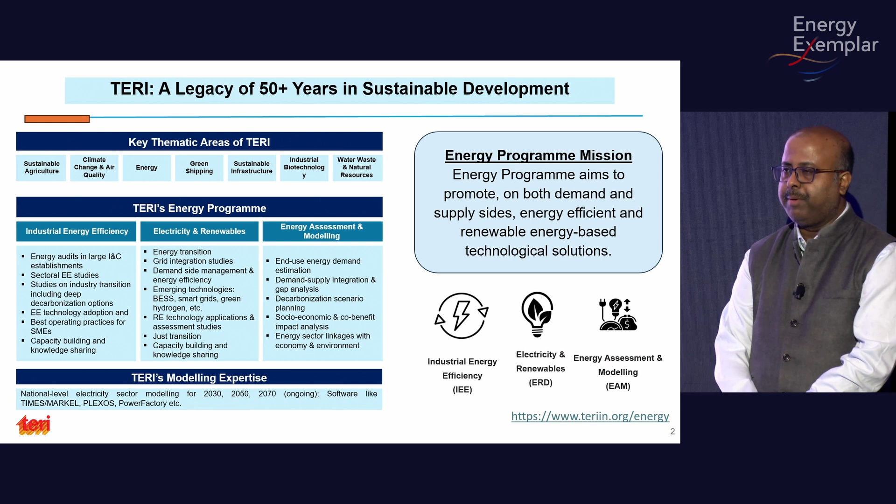So basically, to give you a sense of the work that we do, it's cross-sectoral, in India as well as in different countries in the APEC region and some European regions. We have the legacy of what we earlier called the Tata Energy Research Institute. It was funded by the Tatas. And then in 2000, we became independent as the Energy and Resources Institute. These are the larger footprints of the different types of work that we do, including the energy sector

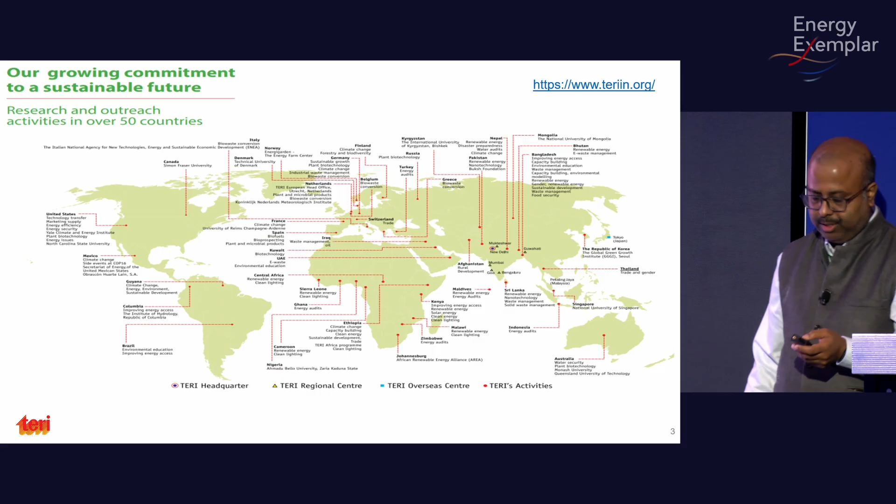and the electricity sector per se. I also represent one of the initiatives that TERI has undertaken with support from the Government of India, Ministry of Power. We set up an Institute of Energy Transitions. Under that ambit, we are doing a lot of modeling work for the country, which also includes today's presentation about 2070 decarbonization of the electricity sector.

Just to give you a little background on the Indian power sector, as I said, we have one of the largest power systems, and all the regional grids are now interconnected. To share some numbers, at present we have more than 520 gigawatts of installed capacity. One of our recent achievements is that we crossed more than 52% non-fossil fuel capacity. Our target was 2030, but last year, in December 2025, we achieved our target of more than 50% non-fossil fuel capacity.

Having said that, solar is dominating. We crossed around 140 gigawatts of solar capacity in the country. And by 2030, we are going to achieve the 500 gigawatt renewable target. Along the way, we also achieved a lot of private sector participation. You are already seeing the tariffs being discovered through reverse bidding or auctions. The competitiveness we have achieved, particularly in the RE space, in solar to be precise, is one of the landmarks in this sector.

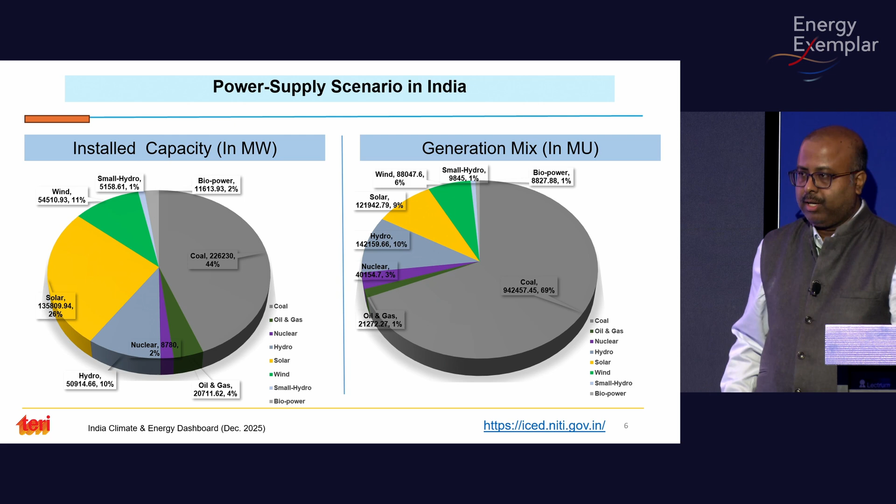A lot of capacity addition has been done, particularly after 2014 when the new government came in. With solar capacity, if you see clearly, almost a 47x capacity addition has been done. With wind, there is a larger room to increase wind power capacity in the country. And subsequently, storage, short term, medium term, and longer term, is also developing now.

On the other hand, at present close to 30% of the generation mix comes from non-fossil fuel, which includes wind, solar, and hydro. To give you some numbers, last year in June, July, and August, for three months, we achieved even more than 40% non-fossil fuel in the generation mix.

So having said that, of course, there are a lot of studies, with the Central Electricity Authority recently coming out with a national level resource adequacy plan for 2034-2035. And of course, NITI Aayog has also recently published a 2070 net zero roadmap that includes the electricity sector.

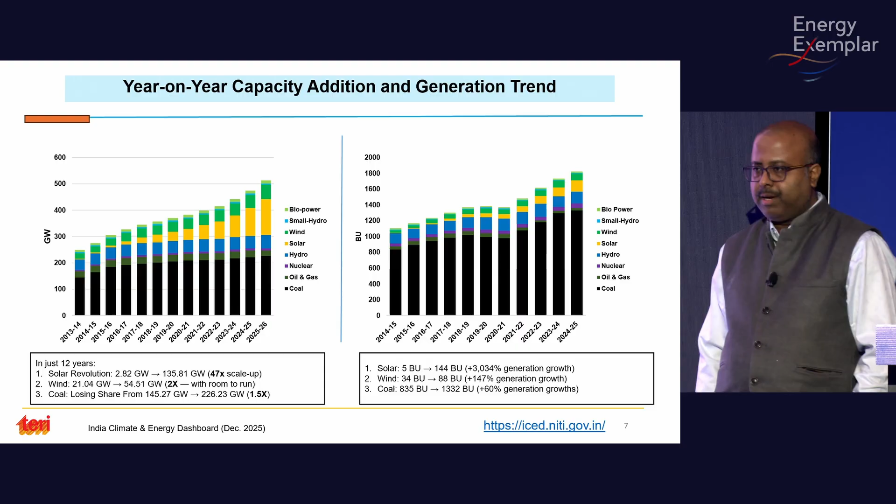But of course, when we do the demand assessment for the electricity sector, considering the different types of loads that are coming up in the country, be it from electric vehicles, electric cooking, a lot of distributed renewable energy that is also coming in, then of course the electrolyzers and data centers, we estimated an electricity demand that my colleague will discuss in subsequent slides.

And then, of course, before coming to 2070, TERI has done a first-of-its-kind 2030 electricity sector modeling, considering the 19th EPS that the Central Electricity Authority has. So we have seen what type of dispatch strategies, particularly in the low carbon scenarios, will happen. So these 2030 results gave us another push towards developing a midterm roadmap by 2050.

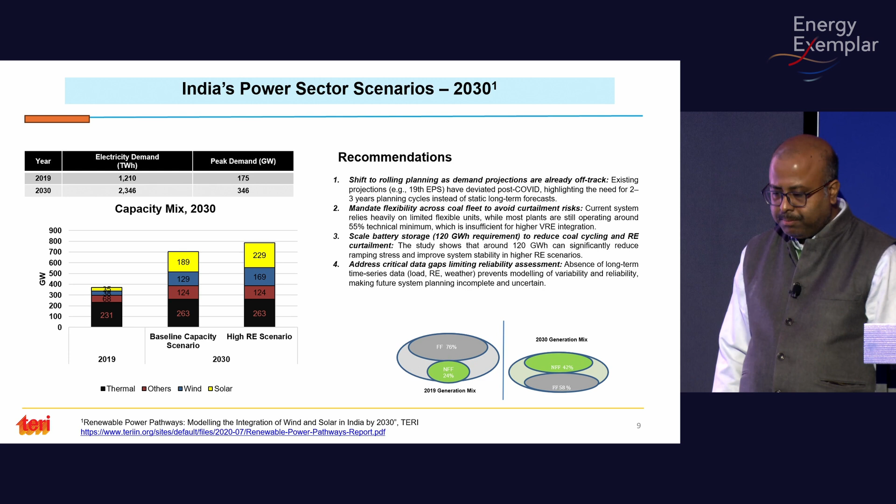So for 2050, we did a lot of capacity expansion planning considering high renewables. By 2050, the capacity that we have added under the net zero scenarios is around 1800 odd gigawatts of solar capacity, and of course the storage and all. There we have seen a lot of land constraints and issues when we grow the solar power.

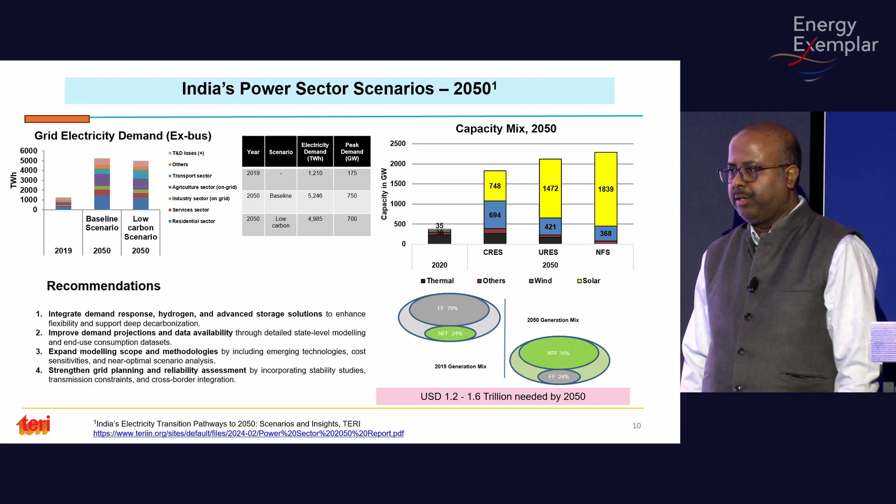And earlier, the assessment that was done by the ministry talked about 740 odd gigawatts of solar potential. So we felt that when we do the 2070 studies, we have to reassess the country's solar power potential as well as the wind power potential. So we came out with the reassessment of solar and wind while doing the 2070 studies. We'll discuss it subsequently.

So now I am transferring the floor to my colleague, Dr. Ajit, to talk about the 2070 modeling that we have done. And of course, subsequently we'll take up questions. Over to you, Ajit. Thank you, sir.

So thank you, Alekhya sir, for explaining our past studies, which were related to planning the optimal capacity mix for 2030 and 2050. Next is our latest study, in which we study the optimal capacity mix for 2070. 2070 is also the net zero target for India. Now, first let's look at what motivated us to do a study for 2070. There are a couple of reasons.

Number one, the cost of technology is changing drastically. For example, the cost of renewables and the cost of storage coming out through reverse bidding are falling like anything. So first, the cost is changing. Number two, there are new drivers of electricity consumption, for example electrolyzers, data centers, electric vehicles. Their inclusion is changing the demand numbers as well as their profile. So our study is crucial to identify the impact on the demand as well as on the profile.

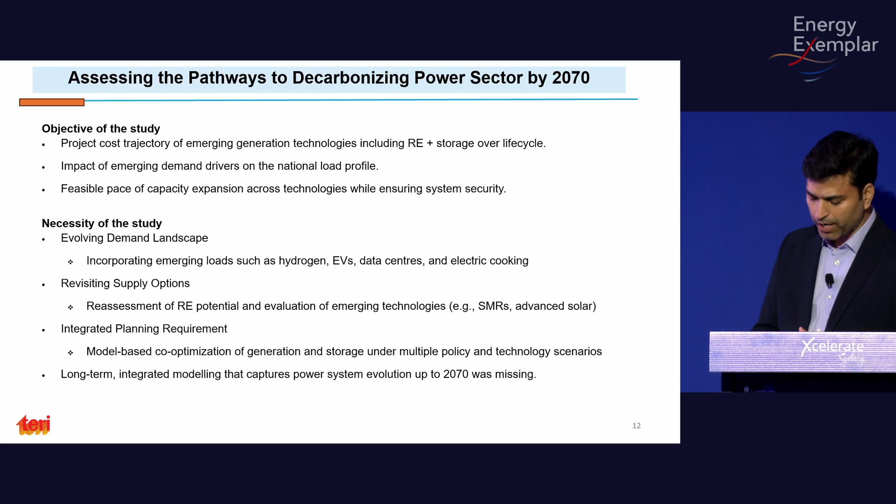Third, obviously, what is the most cost-effective pathway for integrating more renewables and minimizing emissions? So these are the motivations. And apart from that, we started this study about 6 months back, when there was no other study for 2070. Now NITI Aayog, a think tank of the Indian government, has come up with a 2070 roadmap as well. But this study predates that.

So this is the team working on this project. Mr. A.K. Saxena, Mr. K. Ramanathan, Mr. Ajay Shankar are all industry veterans with lots of experience. They have been guiding us in this project. Mr. Alekhya Datta is leading the modeling team, and for the demand assessment, Dr. Ritu Mathur is leading the team. We'd also like to acknowledge the support of BEE, the Bureau of Energy Efficiency India, as well as the Ministry of Power. Apart from that, support from Bloomberg Philanthropies, who were kind enough to fund this study, is also acknowledged.

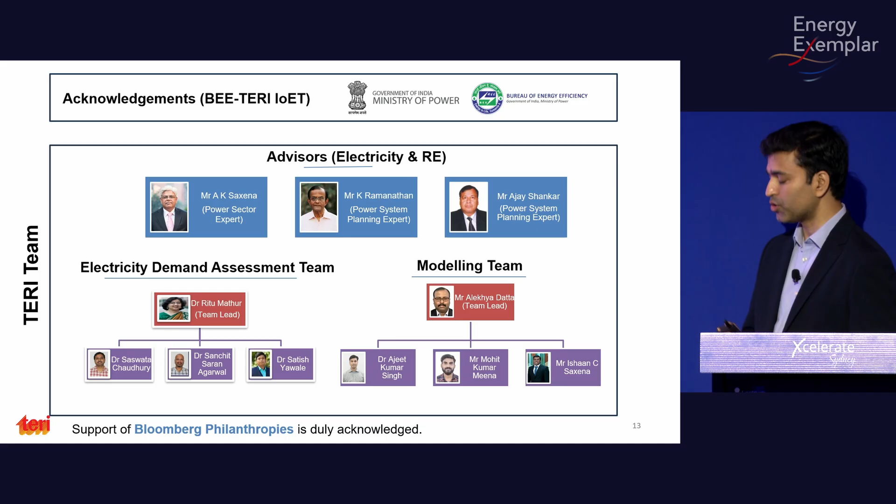Now, in order to find the optimal capacity mix, the first input is demand. So we have used the MARKAL model for assessment of the electricity demand. MARKAL is the market allocation model. We essentially divided the consumers of electricity into 5 sectors: residential, commercial, transport, agriculture, industry. Apart from that, many macroeconomic and socioeconomic indicators go inside the model. For example, in the residential sector, in TERI's in-house model, we require data on cooking, lighting load, cooling, heating.

We have much of the information we have obtained through surveys and our prior studies. In the commercial sector, for example, office: what is the office area, how is it going to project; the hotel area, education buildings. In the transport, BPKM, BTKM. These all form the various inputs to the model.

Apart from that, the sectoral past demand, the pattern, the constraints and the availability all go into the model, and the model gives you what is the energy consumption, what are the emissions, and what are the technology options. This is the effective output of the MARKAL model. So this whole process gave us the annual electricity demand as well as the peak demand.

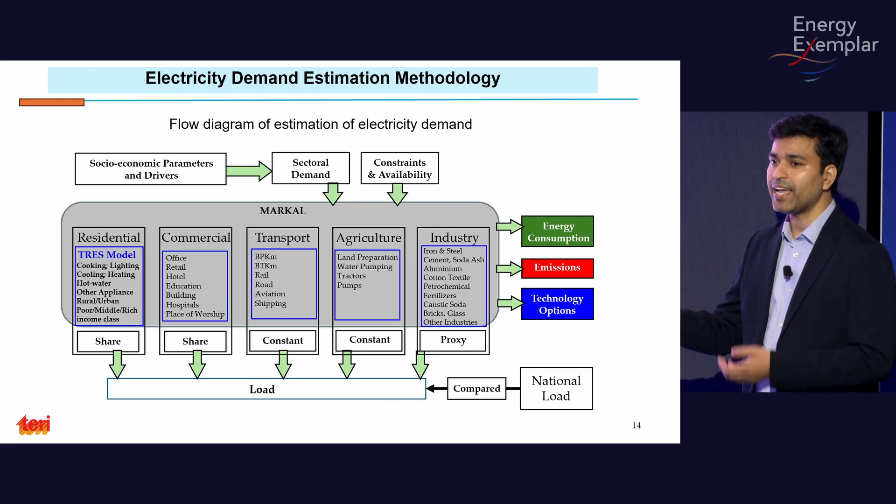So this is the energy consumption pattern at the national level. By 2070, we see that the total demand of India is going to be somewhere around 17,527 terawatt hours. And the peak demand is going to be about 2,640 gigawatts. We see a demand increase of about 10 times in the total electricity consumption from today's date.

And obviously, the major driver for this electricity consumption is going to be industrialization, commercial activities, residential. India is a growing country, so all these sectors will be blooming like anything. Transport, we see an estimated demand of 48 times the current value. The share of agriculture, we understand, will reduce because of modernization.

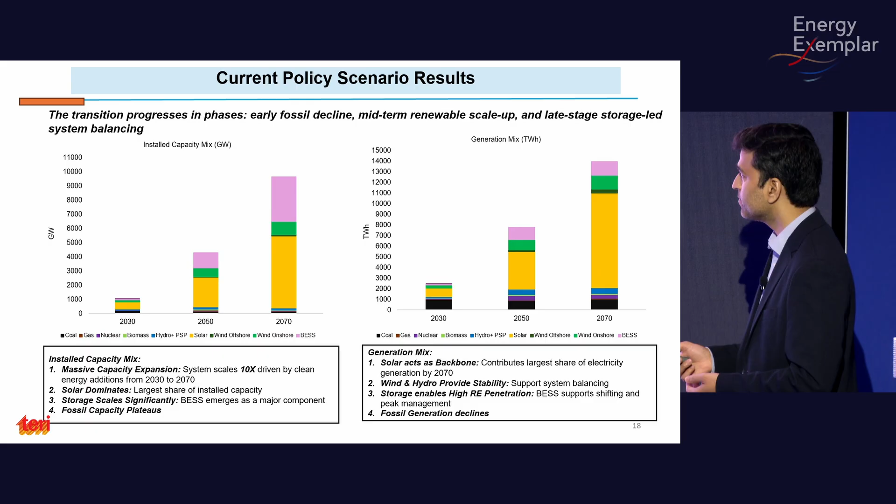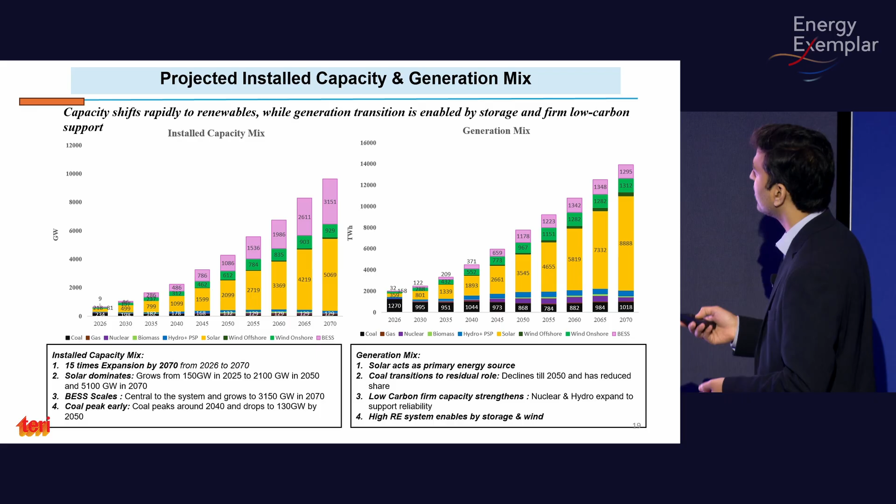This shows the installed capacity in 5-year intervals. You may see that about 5,000 gigawatts of solar is required in 2070. 3,151 gigawatts of BESS is required. Wind is about 929 gigawatts. In terms of the total energy mix, solar will give India about 8,888 terawatt hours of energy. Support is required from BESS in terms of 1,295 terawatt hours. And obviously, BESS and all types of storage will be required in order to have round-the-clock renewable power.

This is the overall share of the installed capacity mix. So we see that about 53% of the total installed capacity, in an optimal fashion, will come from solar, 33% from BESS, and wind will be, I think, 10% of the installed capacity. In terms of generation, 64% is coming from solar alone, BESS 9%, wind 9%, and coal is definitely going to phase down to only 7%, whereas currently it is, I think, about 69%.

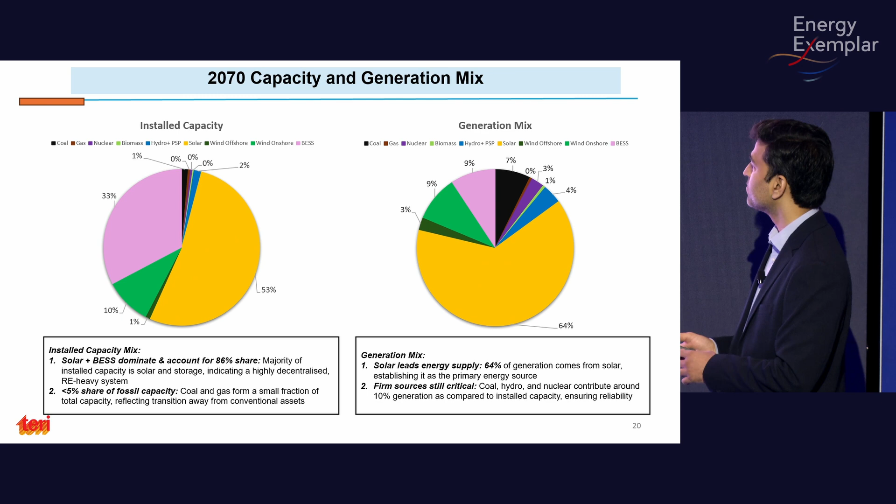So this is the profile of the CO2 emissions from the system. You see that it is continuously decreasing. It is currently at 2,953 MMT. It decreases to 1,840 MMT. It is a reduction of about 40%, but still emissions are there from the power sector in the long run, into the 2070 scenario as well. I mean, these are our interim results. More detailed results may also be required. Yeah, so initially we see a decline in the emissions, but then we see a slight increase in the emissions because of further coal buildup beyond 2050.

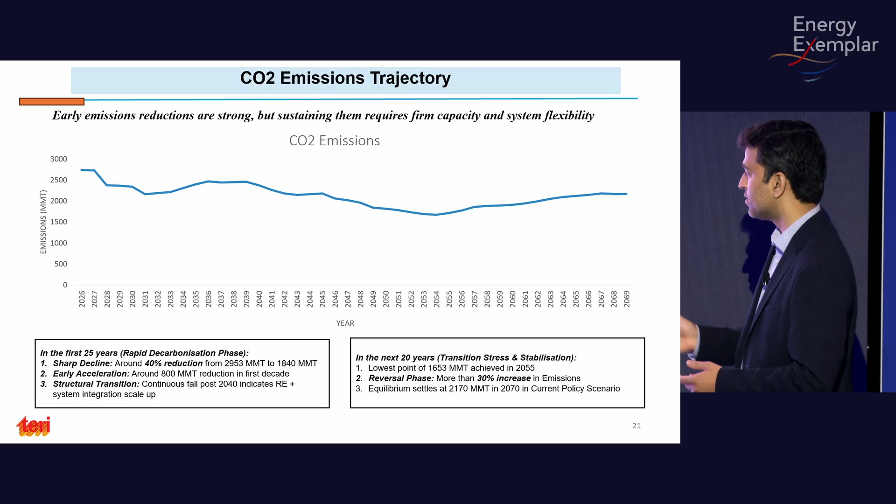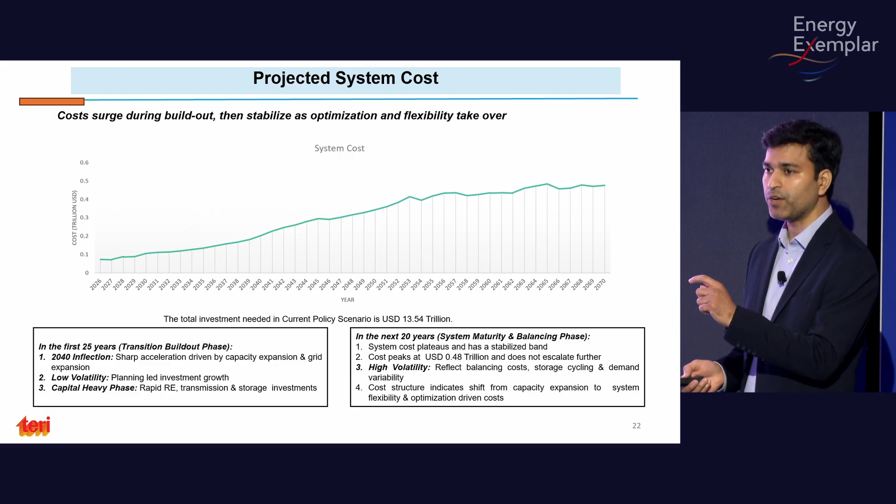So this is the overall system cost which is required under this particular scenario. We see that the total cost required for the decarbonization is about $13.54 trillion US dollars. Apart from that, about 0.48 trillion is also required. This is the number required only for one particular year. This is the maximum amount required for decarbonization in one particular year.

We see a very steady increase in the cost required up to 2050. Beyond that, a bit of volatility. You may see that the graph is fluctuating. So a bit of volatility is there beyond 2050.

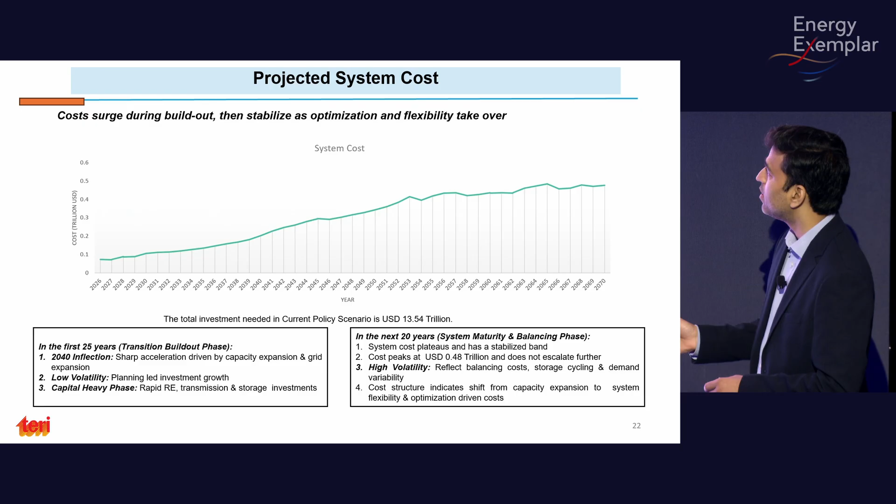Now coming to the recommendations and surveys, we see that the 2070 scenario is largely dominated by solar. About 5,000 gigawatt installed capacity of solar to meet this, and it generates about 8,800 terawatt hour in generation. So a lot of push into the solar is required. Apart from that, solar comes during the day only, so a lot of energy storage is also required.

So the scalar for the decarbonization is going to be battery energy storage. About 3,000 gigawatt of the capacity of battery energy storage will be required. Since solar will be there, a lot of demand build up during the evening hours will be there, which means a lot of flexibility is required for the system to operate.

Apart from that, we have seen that some emission increase is also there beyond 2050. So a lot of thought process is also required beyond 2050 to stabilize the emissions. Apart from that, about 5 times cost increase. We see more than 13 trillion USD is required for the decarbonization. So a strong financial framework and the optimization is also necessary.

Now coming to the global, this is the India level study we have already completed, or we are close to completion. Apart from that, now we envisage building more models. This was under the Viksit Bharat scenario, which is the vision of the national government in India. So we intend to create more scenarios, more analysis, and go further deep down into the state level strategies. And apart from that, using PLEXOS for studies in the transport sector and iron and steel. Those are going to be our priority areas.

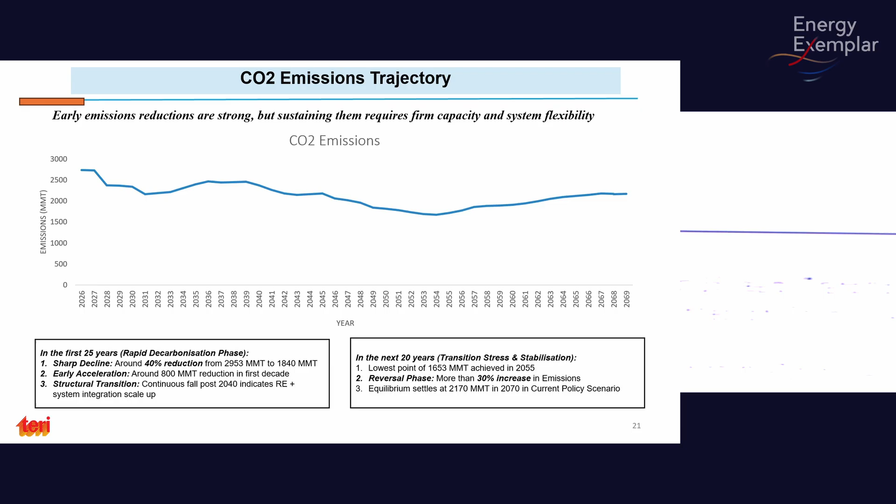Yeah, so if you are going to install so much solar PV, it's going to require so much land. How much do you plan to put on the roof, and how much to put on the land? And how is it reflected in the model?

Sure, very good questions. When we do the 2050 modeling studies, the mid-century one, we have a lot of constraints in our model, particularly on the land availability. In India, the largest pie of the solar sector at present is utility scale. So we assessed the solar potential of the country, and currently we are also doing it for wind. We found around what Dr. Ajit has talked about, around 10,000 plus gigawatt of potential, but that is not only utility scale solar. Of that, for utility scale solar we are getting around 4,000 odd gigawatt.

But one of the largest potentials comes from agri-photovoltaics, because India has large barren lands and also cultivated lands. We only consider horticulture and such, and the potential for agri-photovoltaics is again around 4,000 odd gigawatt. So that means 8,000 gigawatt of potential in the land, which can be used for dual purpose. On the other hand, we also assessed the potential for solar rooftop, which takes a substantial capacity on the distributed solar part. Recently we launched a scheme called Pradhan Mantri Surya Ghar Yojana, where we are solarizing 10 million households to start with, and then we'll scale up.

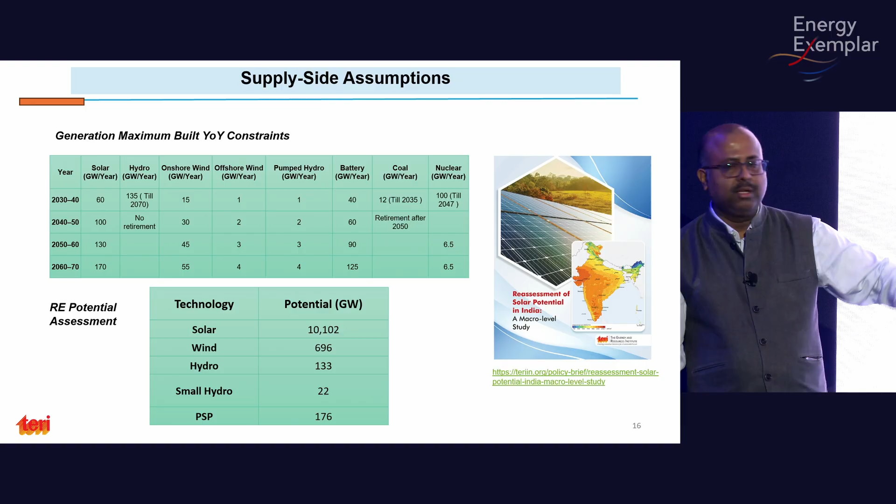But the scale that we have in the country, I think, will be meeting the target to achieve the 8,000 plus gigawatt by 2070 in a competitive manner. Okay, thank you very much.

I'm studying rooftop PV and EV integration, and I'm sure EV is also going to increase substantially in India. And I would like to strongly suggest maybe you should consider integrating EV with rooftop PV or building-integrated PV systems, so that you can directly supply electricity to EV, and maybe from EV you can supply to the building. So that kind of system may substantially reduce the amount of land needed.

Yeah, I absolutely agree with you. When we consider the distributed rooftops, it comes under the net load, which is basically the negative demand at the consumer level. Of course, EVs, till today, before the war that is happening, the geopolitical issues, the gas issues or the fossil supply, there are many studies that have been done at different institutions. The EV penetration, if you see by 2050, 2070, is not as much as what we had foreseen, because in India we have multiple technologies that coexist.

So of course, considering the current geopolitical scenarios, EV would be one. But another area, particularly at the residential level, that we are also seeing is electric cooking, because of the LPG issues. A lot of shifting to induction is happening, not so much in the residential sector, but at least in the commercial, the restaurants, a lot of shift has happened because of the shortage of LPG. So of course, these are also already considered in our electricity demand, what Dr. Ajit talked about in his slides. Thank you so much.

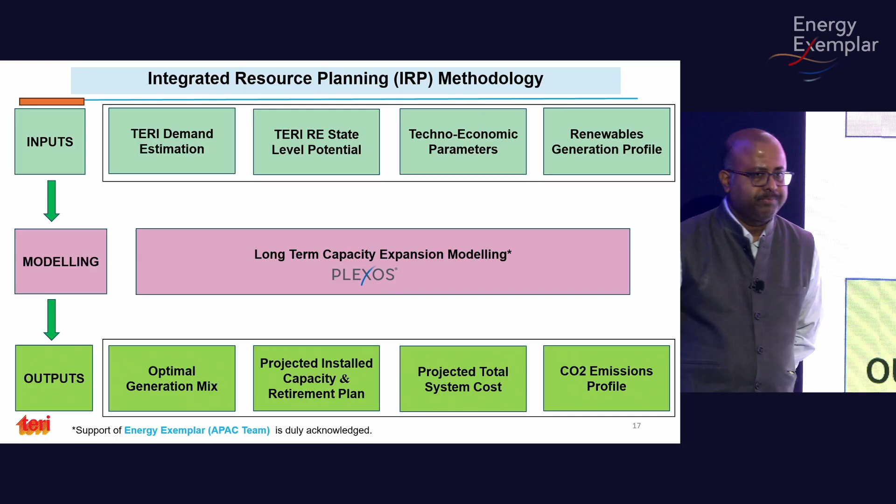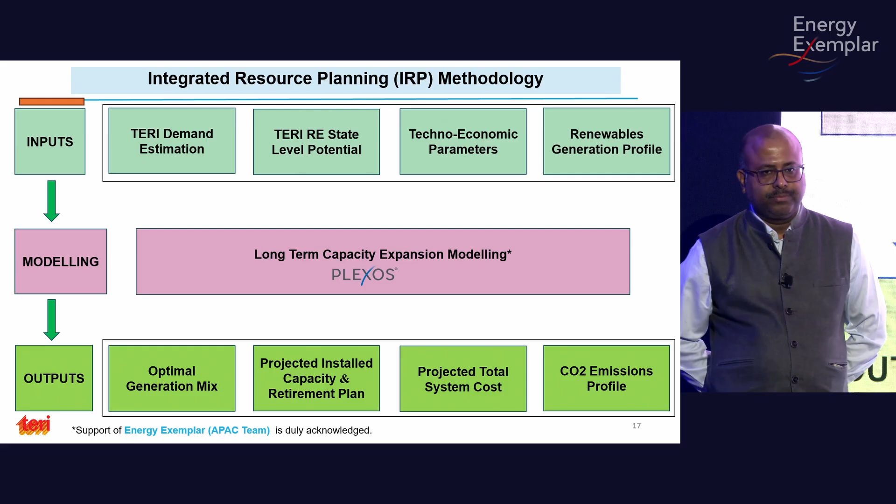The cost you have considered is only the generation cost, because in India the barren land is in different states, but the load growth is in other areas. So have you considered the transmission corridor costs also? It's a copper plate model at this moment, but we will also be building the transmission model into that. You rightly said, because we have 9 to 10 RE states, but the consumption is taking place in other states as well. The transmission constraint will also be taken into account. So this is cost of generation, not cost of supply. Yes, this is just generation.

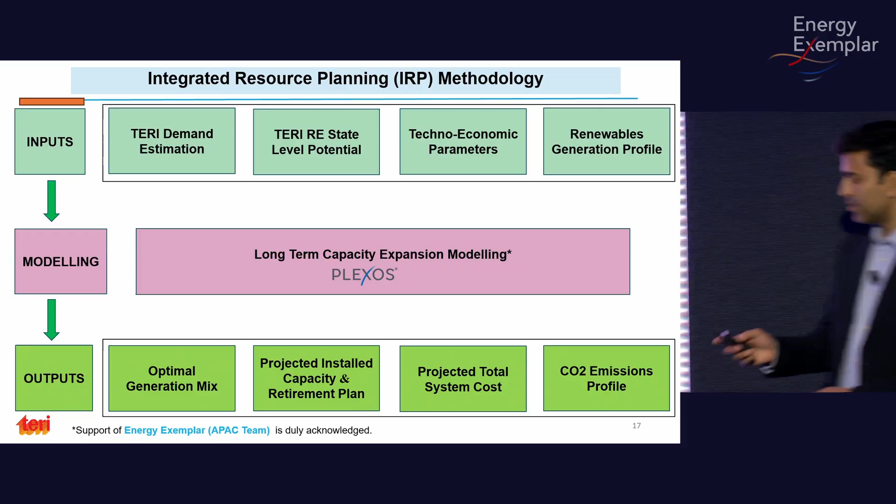That's what I was asking. And one more thing, the load scenarios you considered, the 4 or 5 buckets, sectors and subsectors. I didn't see data centers. Data centers come under commercial. When we're developing the net zero scenarios, we'll talk about the specific demand for data centers and electrolyzers. That is inbuilt in the commercial model. We have not segregated it yet, but we'll have a different scenario which talks about electric cooking, data centers, and electrolyzers.

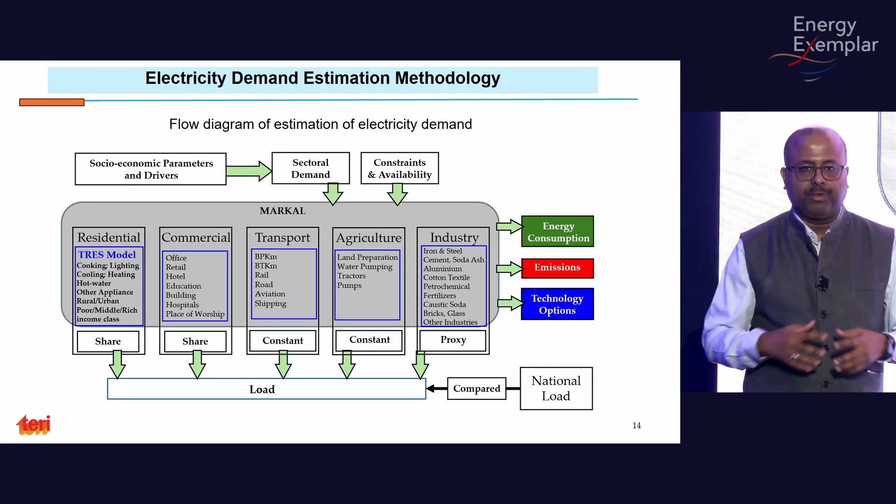Of course, there are a lot of new loads that we are envisaging by 2070, because it's a longer horizon, and there will be a lot of mechanization, particularly in the agricultural sector, like the introduction of electric tractors. So we will run a different scenario for that. Yeah, because that's a big load coming up in the near future. Yes.